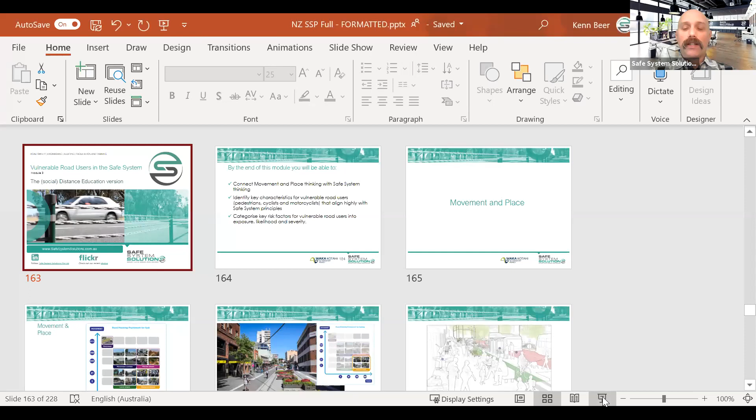Very good, okay. I'll jump into some of the content, and if we get time later on, which I'm not sure we will, we might have a bit more of a chat about some of the intersections.

But I think especially a lot of the group we've got here, who are seasoned road safety professionals, look at an intersection and understand where risk lies. Really the purpose of the assessment framework is to categorize that up so we don't forget any things when we're coming to recommendations, and really it just pushes you into that severity. Now a lot of us were thinking that way anyway, but I think the formalized process of it is useful.

Right, and today we are going to be delving into the vulnerable road users. So I deferred a couple of the comments and questions that came up last week associated with pedestrians and cyclists and roundabouts and those sort of things to this module. We'll cover off a bit of that, but again it's all just about contextualizing some of the stuff you may already know within the assessment framework methodology.

And what we want to get through today is connecting the movement and place thinking, or link and place, or whatever sort of planning framework you're using in New Zealand. Somebody will probably have to type in if you've got another name for how you categorize road space in a place function and a link or movement function. Most jurisdictions seem to be using movement and place, or link and place, these days, but to be honest I'm not 100% sure what New Zealand does in that space.

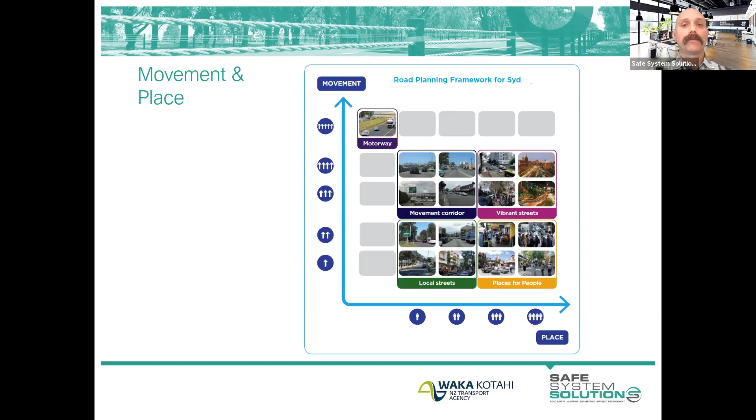So we talked about the places for people, and I think that one we just went through with Kevin was probably sitting in the places for people category, maybe with a step up in a bit of a movement function still there, quite major roads through there. But I think the volume of people and all the trade and the interaction and the crossing recognises its sort of place for people status.

And of course, I'm not going to let you off that easily. You're going to have to tell me when you propose a change, does it alter the exposure, the likelihood, or the severity of crashes? So I'll just give you a few minutes, type anything you want in there.

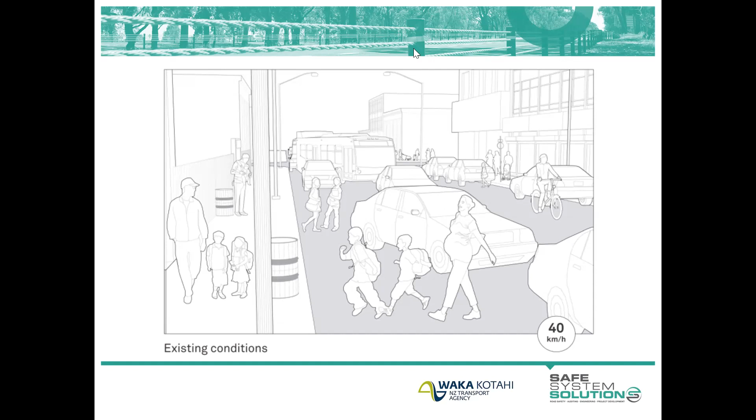Okay, this is good. Hit enter if you haven't yet. I'm just going to run through a few that came in. Some of them went to all panelists and attendees, some of them just went to all panelists, which is Kathy and I. But thank you for those who are popping things in, this is good stuff.

So the first one we've seen there, which I very much enjoy: block the road off to vehicles, exposure. Well, spot on, thanks Ben. That's a beauty, because we acknowledge that this is a place for people, and the traffic flow through there is not a priority whatsoever. So if you can, that would be absolutely fantastic, and it would influence the exposure, correct?

And so we're seeing some things like narrowing the carriageway come up a number of times, and I think that's a great one. And now, again, is the narrowing of the carriageway going to influence the likelihood, the severity, or the exposure? And I saw a few different answers coming in as people put that up there.

In the sense of just narrowing the carriageway, under a safe system assessment, we'd categorise that as the likelihood of crashes, assuming that people are not going to have to walk out onto the road and those sorts of things. The only way it would influence the exposure is if by narrowing it you restricted the number of vehicles that could go through there and did go through there. So if you really narrowed it down, and as a result they took alternate routes and the volume of vehicles went down, then you're into that exposure reduction. So that's good.

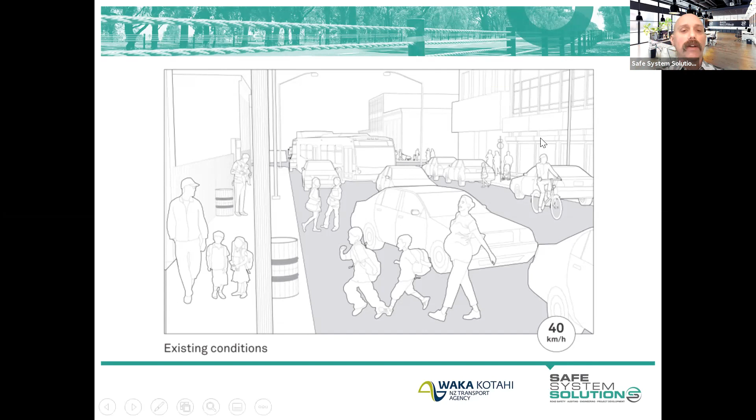There's one, I suppose, again - actually no, I'm going to keep going. That's good stuff. Now, the artistic impression of what sort of people are saying would have much higher alignment with safe system principles, but also acknowledging that you're achieving that through understanding it has this big place function.

This one didn't block off the road completely, which would be a valid way to do it. But these really low speed environments, and a lot of the features you were all mentioning, are being presented by this artist. But certainly we know this has much higher alignment with safe system principles.

This one will probably have a reduction in the exposure score, because there'll be far less vehicles going through there due to the one lane, one direction, and slow speed, and they'll take alternate routes. But you need a bit of quantification of that somehow. Lower likelihood of crashes due to the lower speeds and the smaller crossing point, meaning they're not out there as long to be struck, which is that one we were talking about earlier with Kevin - is that exposure?

We all kind of want to talk about that as an exposure because you're exposed for longer. But I think the practice under safe system assessments is to have that in with the likelihood and the severity, obviously, with the speed reductions and the like. So it's a good little example there.

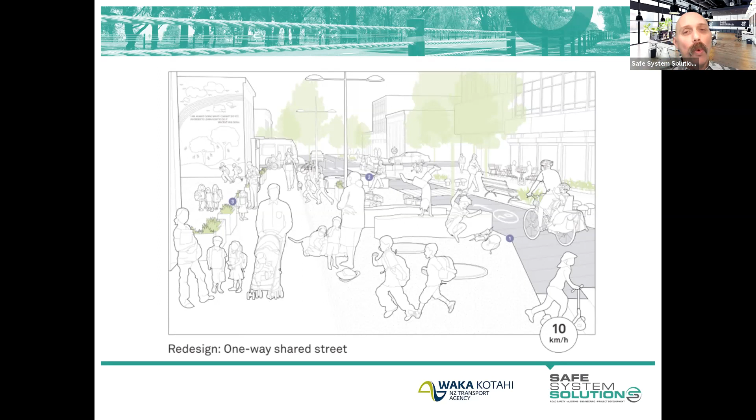And you can see, I'm sure, that the livability of that area and the place function of it is much more a place to be, isn't it? And that's not the objective of a safe system assessment - to assess how good it is as a place, its livability or anything like that. A safe system assessment is solely around that road safety outcome in alignment with safe system principles. However, to understand the aspirations there and then suggest treatments that complement that is what we need to do under these safe system assessments.

So as these place for people facilities rise in their transport movement function, you start to look at how you can still retain as much of that place feel to it, but also be able to put people through it on vehicles and the like.

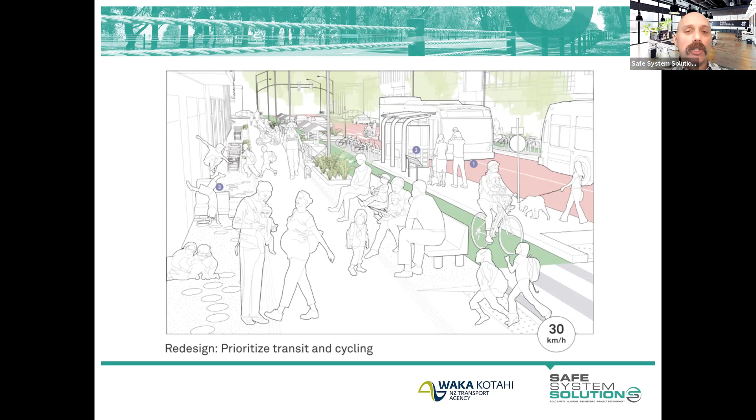And this is probably the example of, as we're getting up to the top of what we would see under something categorized as a place for people, with movement being injected in there. But you can still see it's a very low speed environment around 30 kilometers per hour or below, and it's got some separation there, but any crossing points are very low speed, and there's restrictions on how many vehicles can go through there.

Let's go to the local streets example, or the category in these sort of frameworks. And I should note that the terms I'm using here - place for people, local streets, vibrant streets - they are just, in this case, the Sydney framework, and Victoria was using that as well. I think Queensland's investigating similar terminology. But other jurisdictions use other terms, though the general philosophy is the same. These local streets have what we'd say is low place value and low movement function.

Now you don't want to go and tell the residents that you've categorised their street as low place value. They don't like that. But what we're doing is looking at it from a holistic network perspective, and it is a low place value from the way we're thinking about trade and interaction. This leaves us the freedom to still bring speeds down significantly because it's not a major movement corridor.

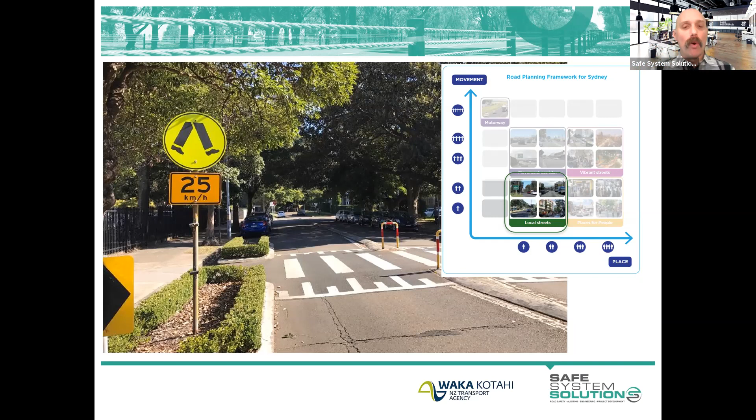When you get these sort of equal trade-offs between movement and place function, the place function usually rises in importance a little bit because it's acknowledged as the one you can latch onto more in your safe system aligned treatments, protecting vulnerable road users in most cases. So we see things like lowering speeds throughout, raised platforms, maybe wombat crossings or raised pedestrian crossings.

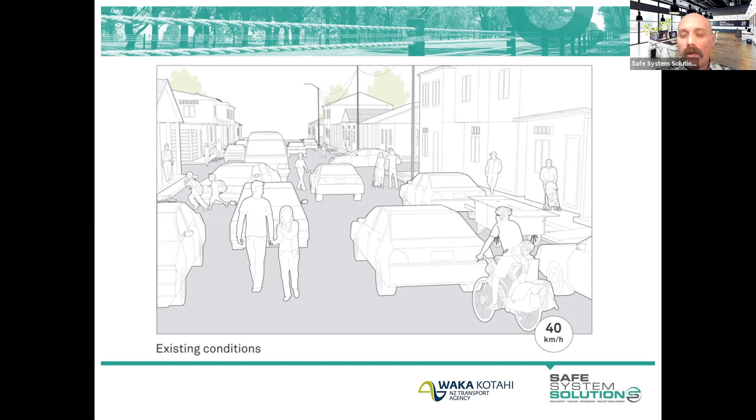So we won't do this one as an exercise together. We'll do maybe the next one like that. But it's the same sort of thing you're seeing there - wide, where you still have pedestrians. I dare say this is a little bit higher volume than most residential streets, but bringing it back into that similar environment where we're seeing a bit more movement function through there, but still very much a place for people.

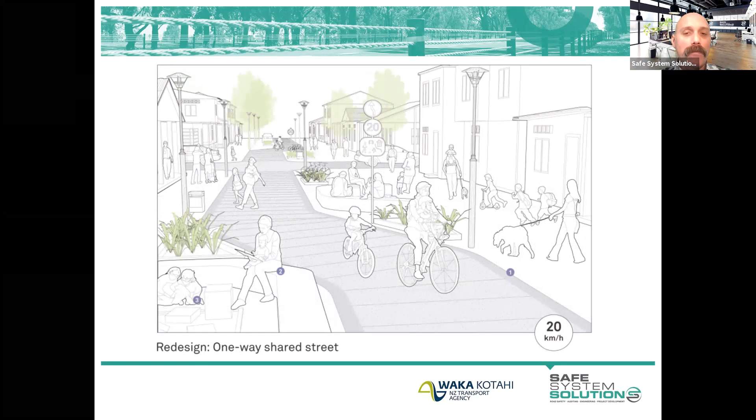Vibrant streets are a very challenging category, as I talked about, because they have a high place function, but they also have this high movement function. I like to push the strategic planners and say, come on, make some decisions here. Can't provide for everybody, and everything can't be a priority. Come on, give us an order.

They're reluctant on a lot of these. I did project manage an Austroads report titled Safe System Infrastructure for Mixed Use Arterials, and there's a lot of vibrant street thinking in that one. We spent some time in Hamilton looking at York Street, I think - no, forgotten what road it is in Hamilton. Somebody will probably write it in. Just up from the NZTA office, around the corner there.

Okay, let's do this one. So we've identified that this road, wherever it is, is a vibrant street. It's been categorized as vibrant street, and they've said it's got high place function and high movement function. So it must have shops and trade and things around there.

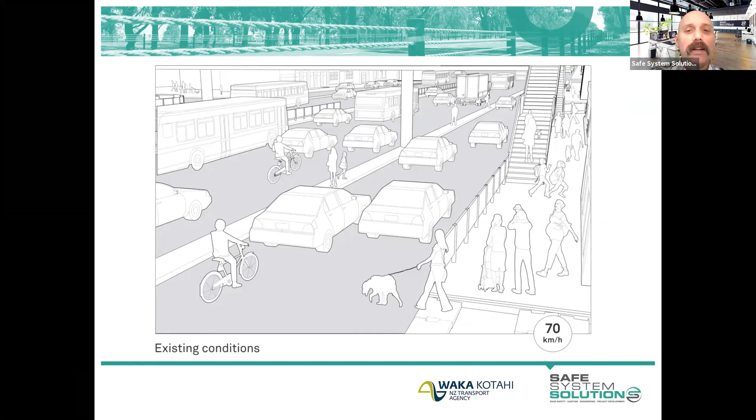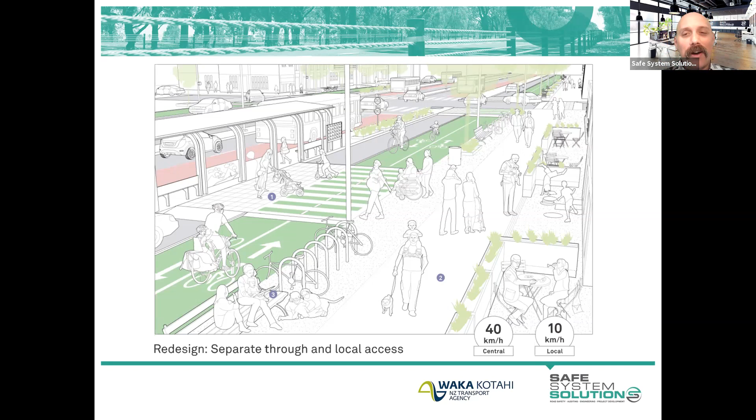That road looks ten times wider, from Kevin. Okay, let's have a look at that. Yeah, it looks pretty wide there, and it might be a bit wide. I don't know, it's meant to be the same environment, but the artists can do magic things, can't they?

There's some of this sort of stuff happening quite a bit in New Zealand, and a lot of jurisdictions are looking at what New Zealand does, because you're moving things along quite well. The purpose of this course is really the formalisation of the framework, the safe system assessment framework, and understanding the categorisation.

But these sorts of separated facilities, this has got to be Christchurch, I think, doesn't it? Yes, it is. Is that exposure, likelihood, or severity? Well, the fact that we still have to cross these side roads and the like, I'd be putting it into the likelihood category.

And again, these sorts of protected signalised intersections, which are starting to be all the rage in the Southern Hemisphere, are really influencing the likelihood. What they do is acknowledge the movement function is still there, but it's a facility that has better alignment with safe system principles for cyclist crashes.

And just a question: would you take into account the increased conflict of pedestrians versus cyclists? Yes, you would. What happens under this assessment framework is you start to not only categorize exposure, likelihood and severity, but you categorize crash type.

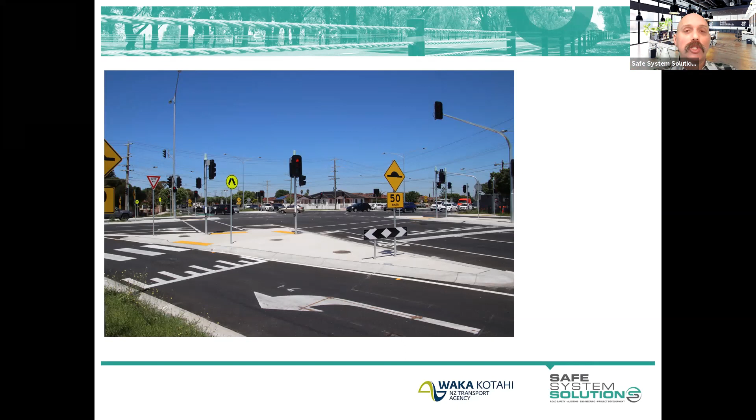Pedestrians and cyclists, obvious stuff, are the most vulnerable to injury of all road users in terms of crashes with passenger vehicles. Severe injury, 10% risk, is somewhere around the 20 km/h impact, and almost certain death at these higher, the 50 km+ speeds. Young and old are even more vulnerable. So we're really looking at trying to get those speeds down around 20 km/h at these conflict points, or otherwise trying to separate.

In terms of these different treatments, we've seen a number already. Yes, so the Copenhagen style separation is very favourable and alters the likelihood most in your safe system assessment. And then the roundabouts - we've had challenges with cyclists at roundabouts for many years.

These sorts of Dutch style roundabouts, ways of treating cyclists and pedestrians at roundabouts, are seen as generally best practice if you can fit them in there. And certainly we've seen a number of these pop up in different jurisdictions around Australia.

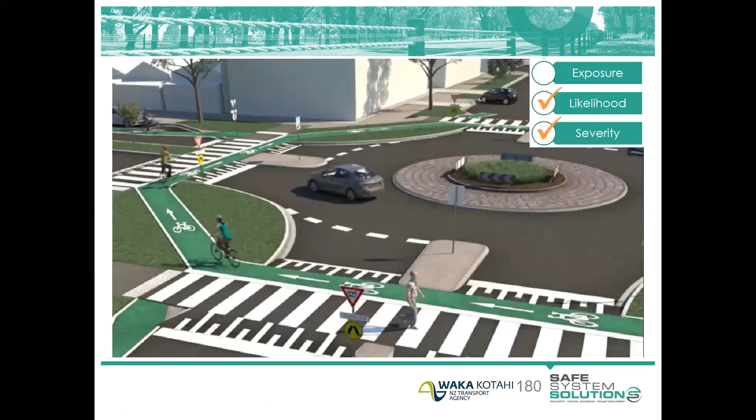Couple of points here - Kevin was just commenting, I'm not sure if you meant the Moray Street one. This large roundabout has high entry and exit speeds designed in. European roundabouts have lower entry and exit speeds due to different geometry. Some cyclists would find these paths challenging. And a follow-up question: do cyclists ever go the wrong way around the Moray Street roundabout?

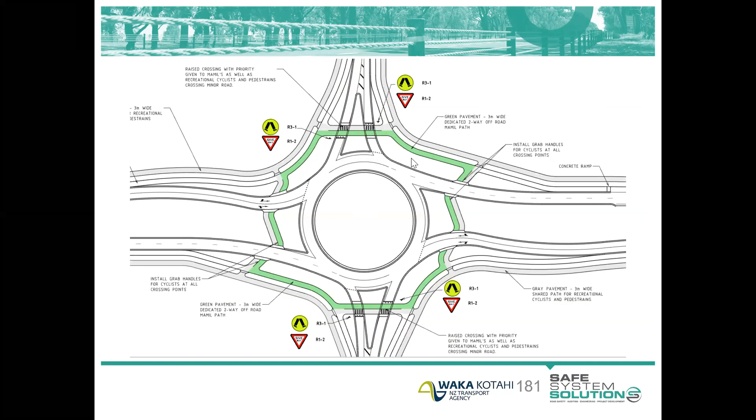There's quite a few good questions there. So do they ever go the wrong way around it? We did an evaluation of the Moray Street roundabout - we had cameras out there for a few weeks and analysed it. We didn't see anybody going the wrong way around it. We did see that a small portion just carried on using the roundabout as cyclists, as opposed to using the facilities, which you'd expect, because not all cyclists are the same, are they?

We have the commuter cyclists, we have what we call the MAMILs - the middle-aged men in lycra - and we have kids and all sorts. So you've got different types of cyclists that would use this. So we didn't see any of that wrong-way riding.

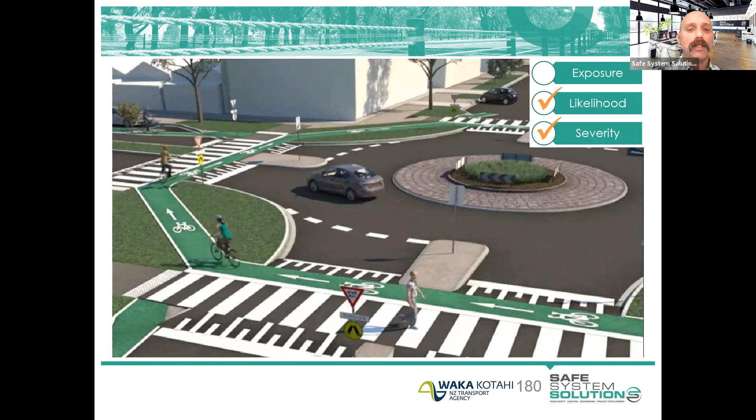The one from Mark about the radial roundabout versus the tangential entry is brought up quite a bit, and there's good debate out there on this - I'll weigh in with my thoughts. These roundabouts that are often produced in these dual-lane areas are intentionally bringing the speed down to that sort of 40-50 kilometres per hour, thinking about the conflict between vehicle to vehicle. So it's not trying to bring it down with a radial style roundabout where you'd have a straight run into it and then an abrupt turn, which the Europeans use a lot more. The great point about this is that it provides that high-speed function, but is also trying to cater for larger movements of cyclists and pedestrians. So we have a bit of conflict there in terms of our priorities. I think that's a pretty valid point to bring up.

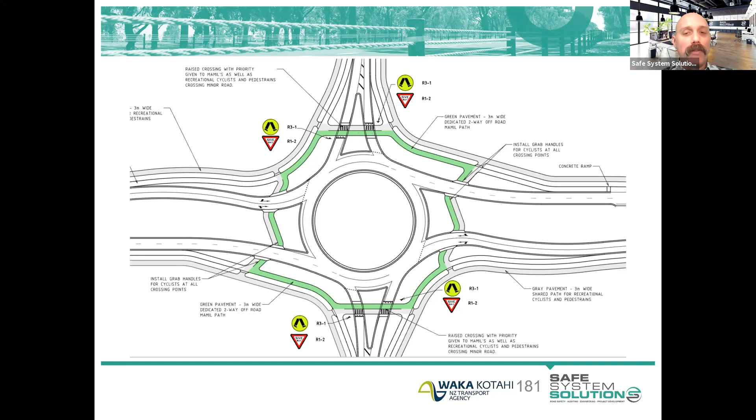I think they were the two that I wanted to cover there. Yeah, you got it.

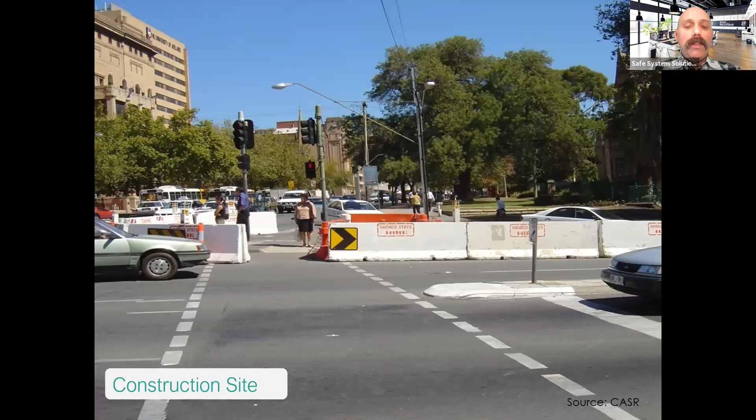This little story that I'm going to tell you, to me, just clarifies that we know what safe system is, and we've known that for a long time - we just don't afford that to the general public. So this is in Adelaide, and there's an island there, a slip lane on the other side of that island, and they had a couple of workers doing some work in that island with the electrics and all that sort of stuff, and they were in there for about a week.

And so for these two workers, what was put up were barriers and a work site speed limit reduction - in South Australia, interestingly, that's a 25 km/h speed limit for a work zone. So 25 km/h back in the day when this was taken. They did their work for the week, then finished, packed up, and the barriers were removed. The speed limit went back up to what it was, 60 km/h back when this was taken.

And then we saw about 3,000 or 4,000 pedestrians per day standing in that island. So what that really hammers home is that we know what safe system is, or what high alignment with safe system principles is, because we were affording it to those workers, but the general public, well, no.

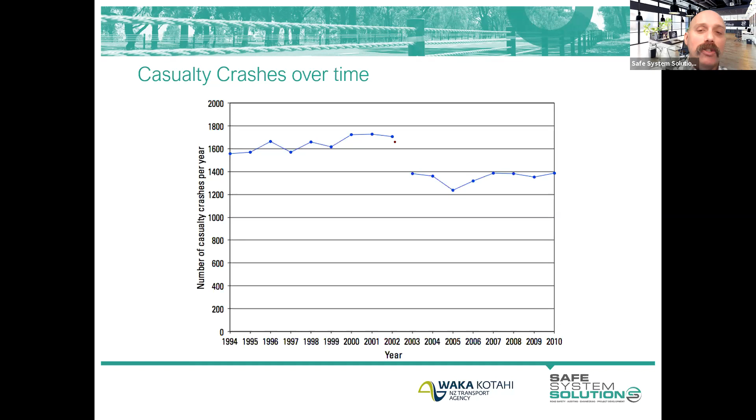The regulatory speed limit is such an important aspect of both the likelihood and the severity. And I just love this graph in terms of the year that they changed the 60 default to the 50 default, and the casualty crashes per year for pedestrians - you can see that down there.

All right, now motorcyclists - I've got sort of 5 S's that I look at for motorcycle safety, and I've told some of you this before: sight, surface, sign, strike, and speed. There's still good things to think about when we're doing safe system assessments and thinking about motorcyclists. But motorcyclists end up in most safe system assessments popping out as the highest score, and the highest score is the worst alignment with safe system principles, and that's due to their vulnerability and their ability to get up to speed.

So biomechanical tolerances, which I'll show you shortly, are not anywhere near those of passenger vehicles. They don't have the shell of protection, and the speeds, which are quite high, mean being struck by high-speed vehicles.

When we think about those, the likelihood factors are the sight, the surface, the signs. Can you see the motorcyclist, or can the motorcyclist see what's coming up? The surface and the signs, they're all likelihood factors. The strike, being what the motorcyclist will hit and how they'll hit it, is influencing our severity. And the speed, as we've talked about with other stuff, that's influencing both the likelihood and the severity.

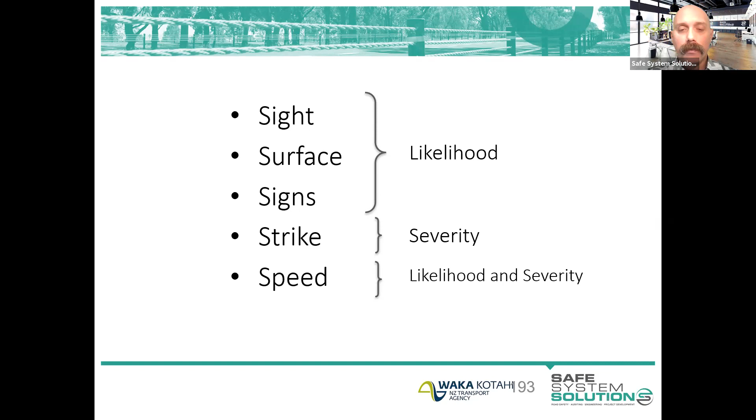This one's not in your notes, but I've popped it in because I think it's fairly groundbreaking research, which has just recently been released. End of last year it was released, and hasn't got as much traction as I think it should have. This is some injury risk curves for motorcyclists in different crash types, and I think this is the kind of thing we needed more clarity around, because we've always just lumped motorcyclists with pedestrians and cyclists, and there's slightly different characteristics. But we're seeing the MAIS 3, the injury severity index of 3+, so sort of high-level serious injury and fatalities.

And we see here for passenger vehicle crashes head-on, they're talking about relative speed. The reason they're talking about relative speed with motorcyclists is the fact that the motorcyclist will be pushed back - like they don't have the weight to push the passenger vehicle back. But you're seeing some of those more flattened out curves, which is different than some of the S-curves we've been using in the past, and somewhere around the 50 kilometers for that.

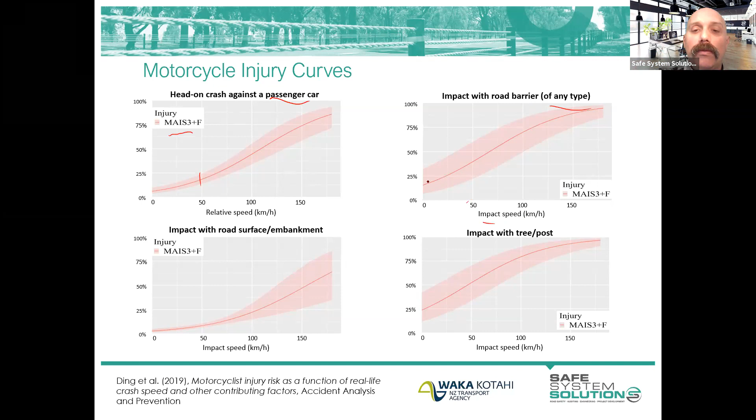There, but we're seeing - if these ones are actual impact speed, but road barrier of any type - we're seeing there we get some of these sort of, it's going up fairly quickly there. Tree, post, surface embankment, and the graphs are there. What I'll do is get Kathy to just send this slide through at the end of this session, because I think it'll help, and you might be able to use it as you're dealing with motorcycle challenges. But it's interesting stuff.

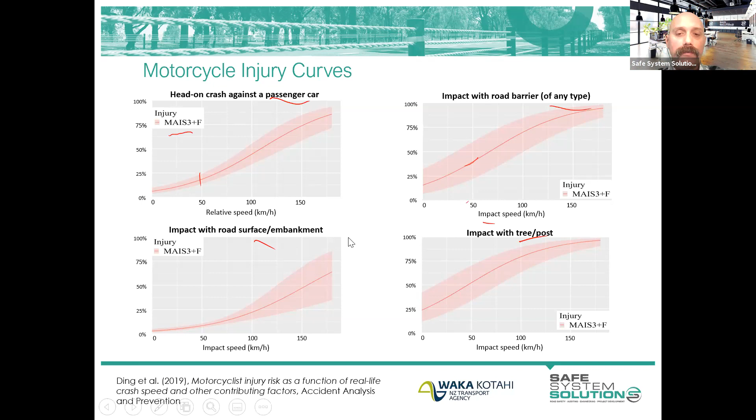So, sight. Can the motorcyclist be seen? Motorcyclists are obviously smaller, harder to see, and so inevitably in a safe system assessment, their likelihood score is going to be a little bit higher than all the crash types of the passenger vehicles, because they're harder to see. They have an inherent instability, being two wheels. They're more influenced by the surface conditions and those sorts of things. Much easier hidden behind trees, signal controller boxes, power poles, and other vehicles as well. So obviously the likelihood is up.

The surface, again, is a likelihood factor in there. We know that the lean of the rider and the contact patches are small on the surface, and we call the motorcyclists the canary in the coal mine for maintenance surface issues. They're the first to have that as a factor influencing their crashes.

So these are the likelihoods of crashes. If you go in to do an assessment and you go out there to the existing conditions and you see that there's surface deficiency, be that a polished surface, flushing or potholes or anything like that, those are going to influence the likelihood of motorcycle crashes. Steel plates, any of these slippery surfaces, still influence the likelihood of that crash.

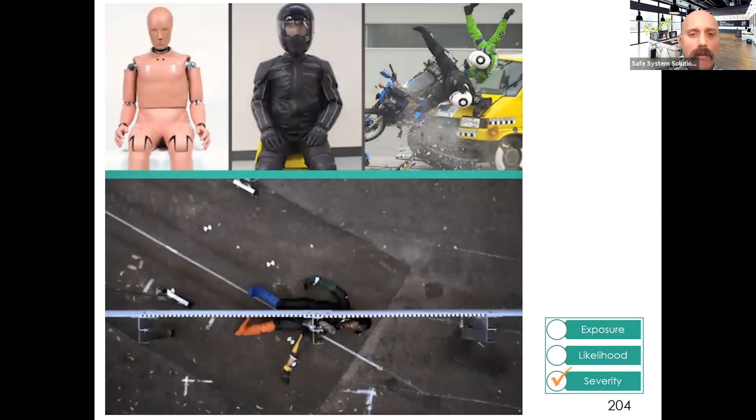There's a European crash test for motorcycle dummies, and they use an 80 kilogram modified dummy where they just modify a few little bits and pieces to make it more like a motorcyclist. Something to do with thumbs to be able to hold on to the motorbike, and something to do with the neck. But anyway, the European test is crashed at 60 kilometers per hour at 25 degrees, into just a Charlie post, a C-beam. You can see the crash that happened there.

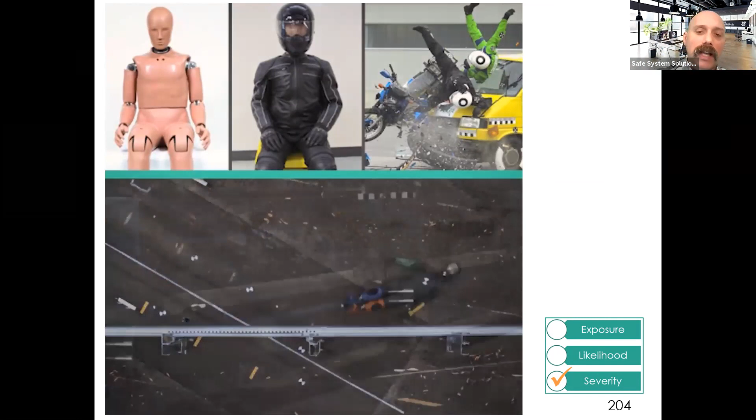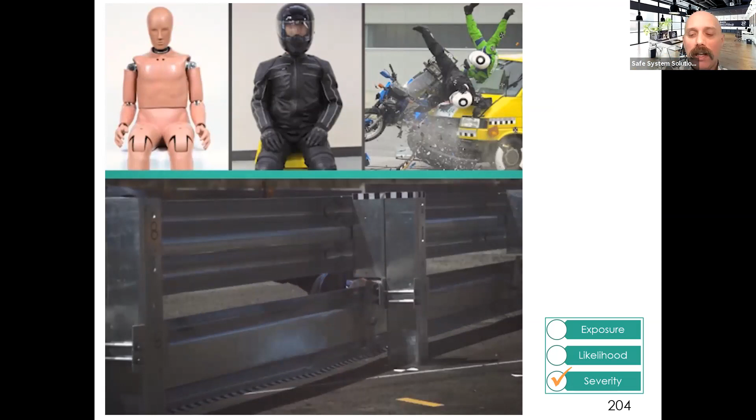This is with some underrun protection. It's still only at 60 kilometers per hour, but we can see the deflection of energy there, which is providing us with really great benefits in terms of rider safety. So this is passing those European crash tests with that underrun protection - the deflection of the system, the redirection of energy is all giving us great reductions in the severity of the crash. So the crash has still happened, and it's just lessening the severity.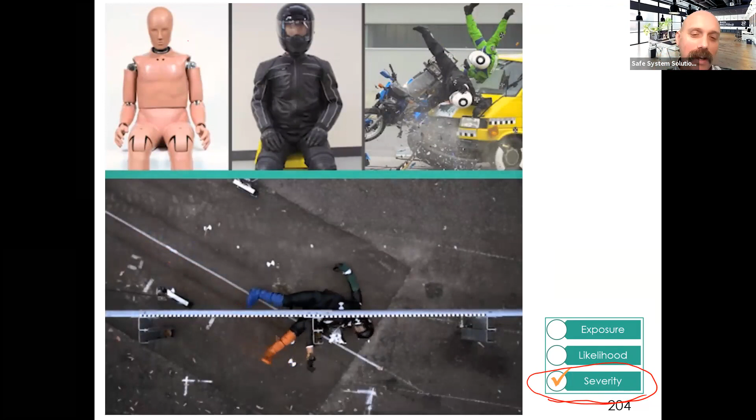Funny story about that crash test, which was done at Crash Lab in New South Wales, is that these dummies cost about $250,000 to $300,000 each, and they chucked it down there into their barrier, and they wrote off the dummy. So had to buy a new one to continue their testing of the rub rail. Maybe should have started with the rub rail test.

There's lots of different underrun protections available, so check your local approved systems or the ASBAP lists to determine which one you'd use on which barrier system. Those going to barrier training on the 25th will be inundated with information about underrun protection for different barrier types.

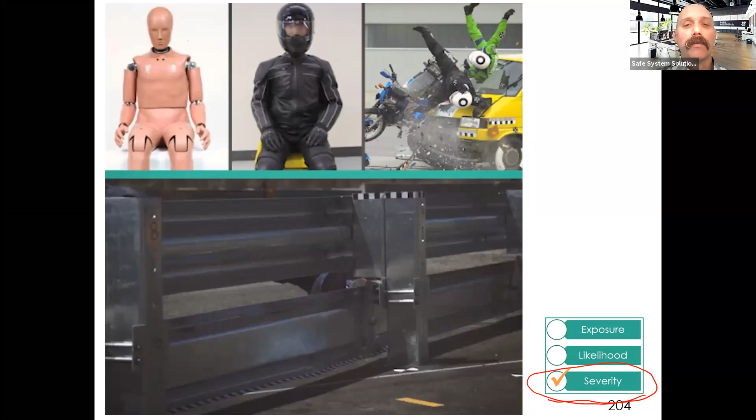Speed influences both the likelihood and severity of crashes for all road users, including motorcyclists. Advisory speeds can help reduce both likelihood and severity. Regulatory speed limit reductions work, and any other ways we can reduce speed will produce benefits in both categories for motorcyclists.

Okay, a couple of questions for the group, we're running along in good time here. Is there anything associated with pedestrians, cyclists, or motorcyclists you'd like more discussion about, or anything you'd like to share with the group about treatments happening and how they might be thought about under the Safe System Assessment Framework? I'll pause there, very open-ended. Any questions?

Thanks, Ken. We had a question earlier when you spoke about dwell on red for pedestrians, and the comment from Kevin is it's a good idea for pedestrian priority streets. Why not have ped phase as a resting default?

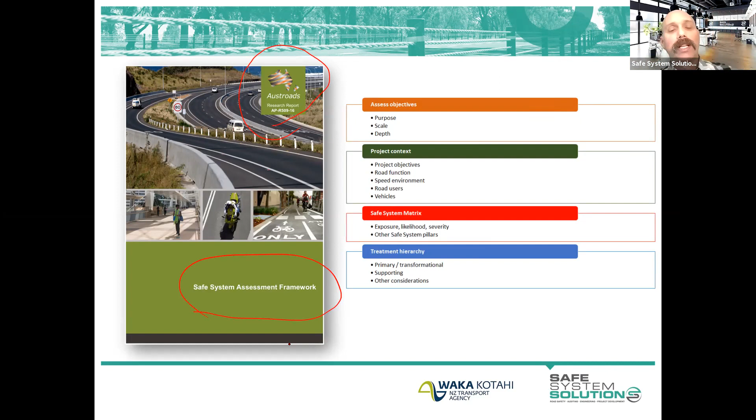And the assessment framework is documented in this document, and as I said, that was released in 2016. It took a couple of years to actually get traction and a lot of people using it. We're seeing a big swell of safe system assessment happening now. And in the hundreds of safe system assessments that have now been done on major infrastructure projects around Australia and New Zealand, there's been some learnings. Austroads hasn't updated and done a version 2.

And so the jurisdictions are starting to put out a few of their own clarifications around it. When you get in there and have a play around with a safe system assessment, you'll discover some things that you might go, oh, I reckon this could be improved one way or another. And it is a fairly new process. So those things we should be feeding back to Austroads. We should be putting in local guidance to try to improve the whole thing.

But the assessment framework is very versatile, and it was always intended to be very versatile in its production. It can be done on a remote community. It could be done on a design of a new intersection upgrade. It could be done on a whole infrastructure program if you wanted to do that. And so the scale and the depth of the assessment are something that you can alter around.

You really get into understanding this project context. And we talked about that with the movement and place categorization, the road function, what's the purpose of the project, what are the vehicles, what are the speeds, what's the composition of vehicles. We do the matrix, which I've been alluding to, and some of you have played around with. And if you're a bit confused still about that, don't worry.

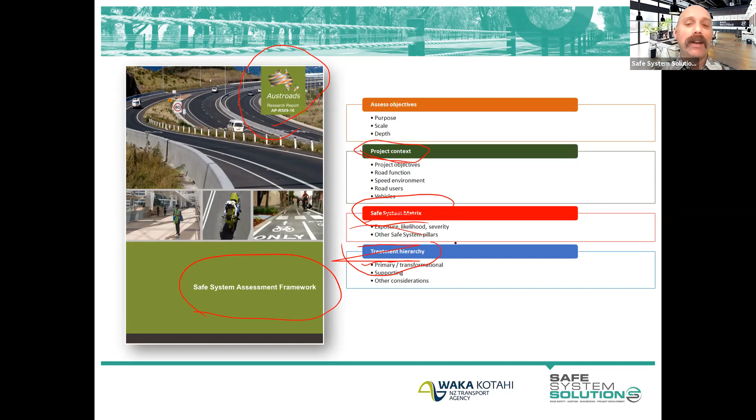Next module is all about walking you through filling out a matrix and presenting that information. And then the thing I'm pretty much going to finish on today is just highlighting that the treatment hierarchy is something that we do in a safe system assessment, is to say that some treatments align a lot better with safe system principles than others. And what we do is categorize them into primary or supporting.

We categorize continuous barrier systems into that primary categorization. We categorize raised safety platforms that bring speeds down to those tolerable levels for primary. Again, probably for the intersection crashes between passenger vehicles, if it's designed around the 50 or 40, and it'd have to be lower than that to get the primary categorization for the more vulnerable road users, being pedestrians and cyclists and even motorcyclists in that sense.

The supporting ones are things that we know improve road safety, but they don't get us to that high-end, almost elimination of death and serious injury. So things like delineation, line marking, surface improvements, warning signs, even traffic signals in a lot of circumstances are considered that supporting treatment. Now, I've brought that up early because it's something that a lot of safe system assessors, as they're starting out, sort of struggle to categorize things.